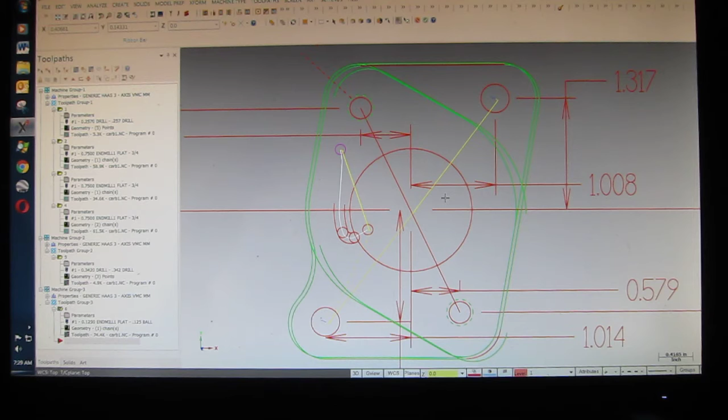I was not upset. I told Bob, this is a godsend. This is a godsend that this is happening, because this is the best thing ever in the history of the universe in my career. Okay, the part's no good. Has to be remade with smaller bore. Okay, great. What a blessing, Bob. I gladly want to come up there because we're making memories. This is absolute classic.

Okay, anyway, I wake up, look at my text messages that Bob had messaged, because he took the part to the guy. Now he says, the part is perfect. The part is perfect. David says, you should start making them and selling them.

Unbelievable. Unbelievable. But now three times we've wavered back and forth that a mistake was made. And it turned out the part is perfect exactly as I did it. And I texted him just now, are you saying now the part is perfect? And the guy says, start making them and selling them?

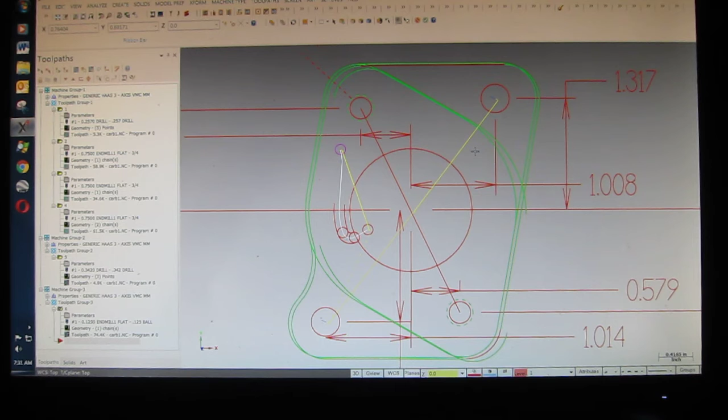So this is why, especially for machinists, if you're the person designing the part, you have to be tough, you have to be cold. Let me go back into top view. Shit.

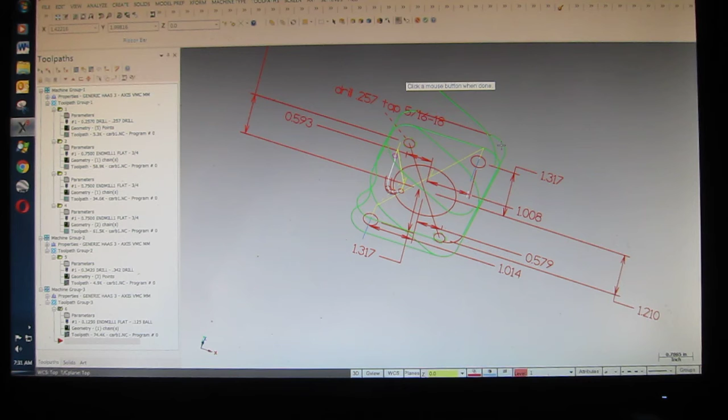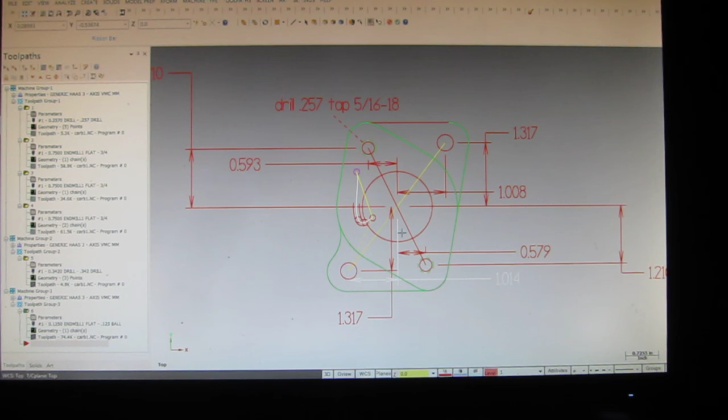Okay, I then set up the part and dialed in this bore. That's 0. I did this on the Bridgeport, not the CNC. In other words, you're using the Bridgeport as a coordinate measuring machine. So I dial in this bore, I then go over to this hole and note where it is. You dial in that hole, and this hole, and this hole. You thus have created pretty much your solid model.

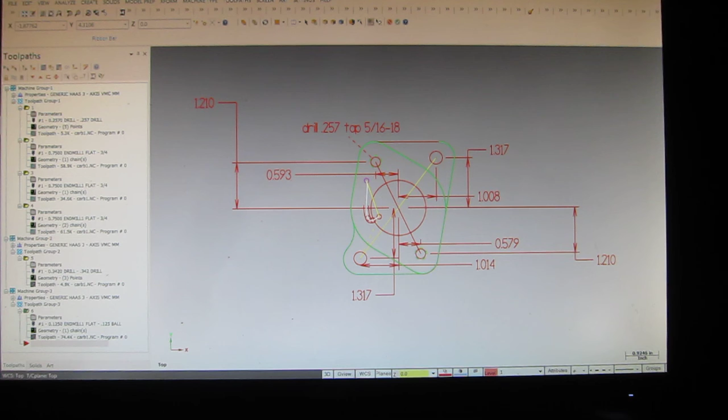That is why, see here is 0, and here it says 1.210, and down here it's 1.210, up here it's 1.317, 1.317 there. Well anyway, you get the point. You set up anything on a Bridgeport and choose a reference, and then you crank over to the location of the existing part and use it as a coordinate measuring machine. Maybe beginning machinists don't know to do that.

Anyway, I'm surprised the battery is still going on this one.

But now it turns out Bob messages the part is perfect. And he says, but the day before, well, you looked in the top view and this and that, and I didn't know what was going on. I was confused. That is why you made the mistake. And I told him, okay, on the bottom, marked here in felt pen, it says bottom, and on the top it says top. That is what I drew. Now you tell me that you got confused.